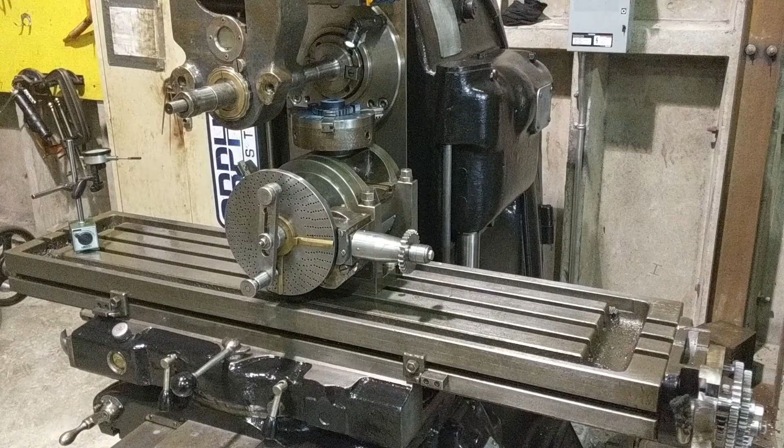So to finally finish off my gear rack assembly, I need to cut a dogtooth clutch on this gear. Much like the handle here. And it's 7-tooth. So most of you probably know this already, maybe some of you don't, but what do you index it to? Do you index it for 7?

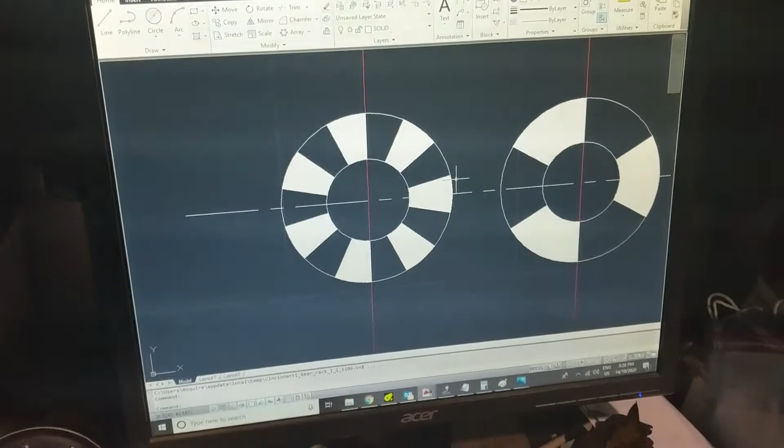Do you index it for 14? The answer is pretty simple. You just index it for 7. And I'll show you how. So I bring you over to AutoCAD because I want to show you, it's an easier way to represent this.

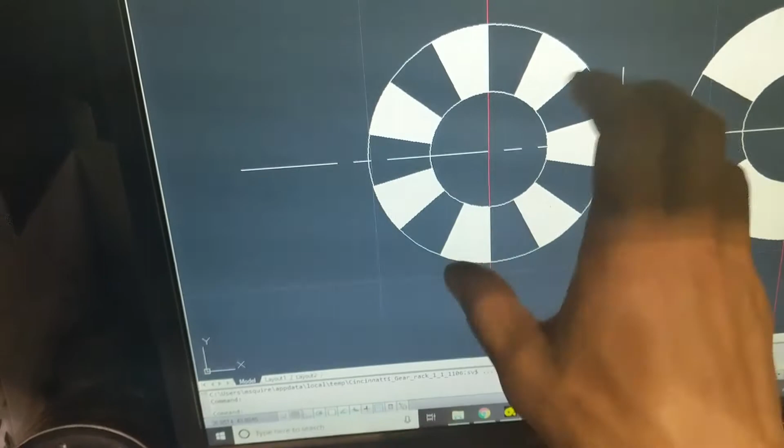So basically on these dogtooth clutches, the side of your teeth is a line that passes directly through your center. Odd tooth clutches are really easy to cut because you could just take an end mill or saw blade, as long as it passes through the smallest portion of the tooth there. You can go right on through, index it, right on through, index it, right on through. By the time you get however many teeth spaces done, you will have cut all your teeth.

Same thing with the 3 dogtooth clutch. It's very easy to do. I think you can get away with a 3/8. Yeah, you can get away with a 3/8 saw blade for that one.

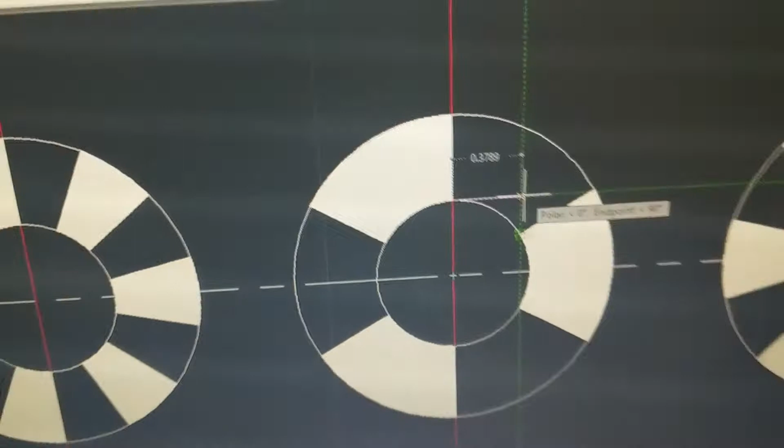Even tooth clutches are a pain because, well, the line still passes through the center of it, but a cutter cannot pass through the center of it. You wind up hitting into the other side of the tooth. So in order to do that, you'd have to do one face at a time, which is obviously going to take you twice as long. You could still do it with a slitting saw.

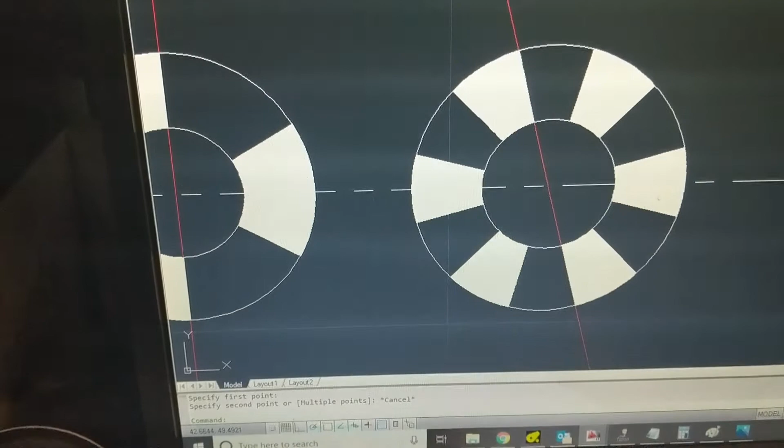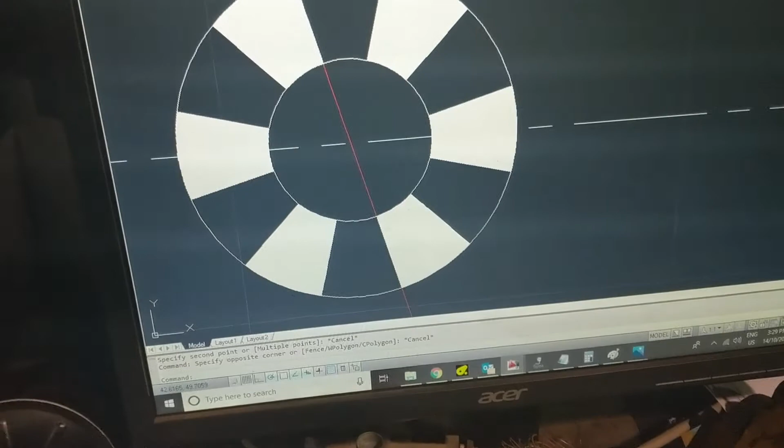So I'm using a 3-inch slitting saw, and if you find out the chordal distance at 150 thou deep, which is what I'm doing, you'll come up with, from the center, 650 thou. And there's a 7/8 hole in the piece that I'm making. So, if you go along with your slitting saw, by the time it exits the cut here,

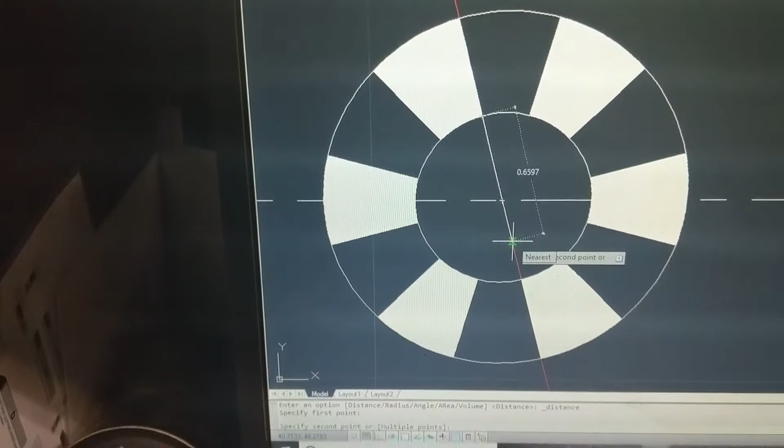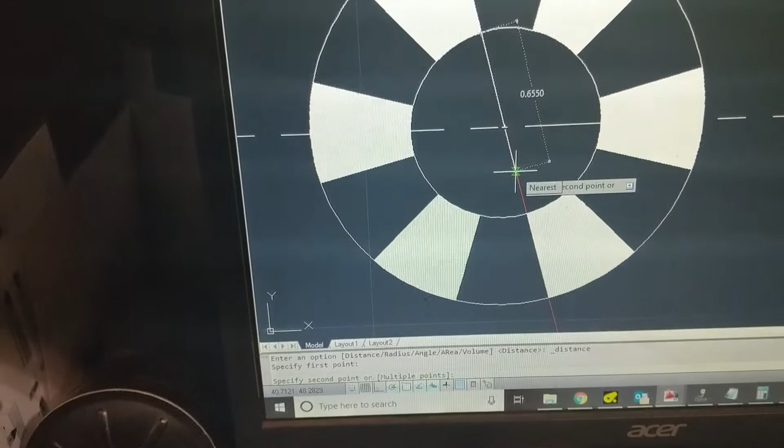your saw blade will be right there. That's how far it'll be away from touching the other side of the tooth. So you'd be good at 150 thou deep with a 3-inch cutter for this specific clutch. This would work out really good. It's a lot easier to figure this out in AutoCAD. You can figure it out just on paper, but it's a hassle. And anyway, I'll show you more about this when we get into cutting it.

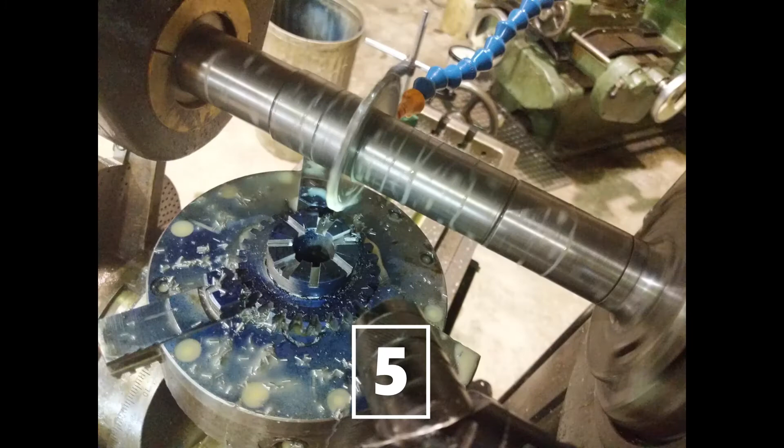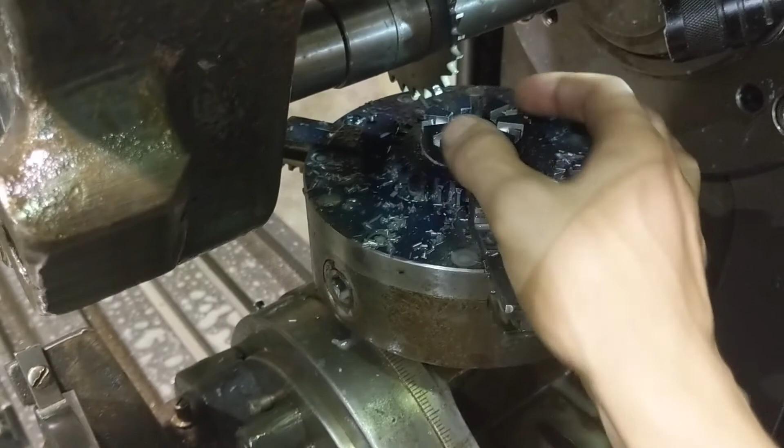So like I said before, I know the diameter. It's 1.8. I don't even need to concern myself with the thickness of the saw blade so long as it passes through the smallest portion of the teeth. So all you need to do is touch off, move it over 900 thou plus another 2 or 3 thou, and just start cutting. By the time you get 7, in this case it's 7 teeth, so by the time you get 7 spaces done, you have all these teeth.

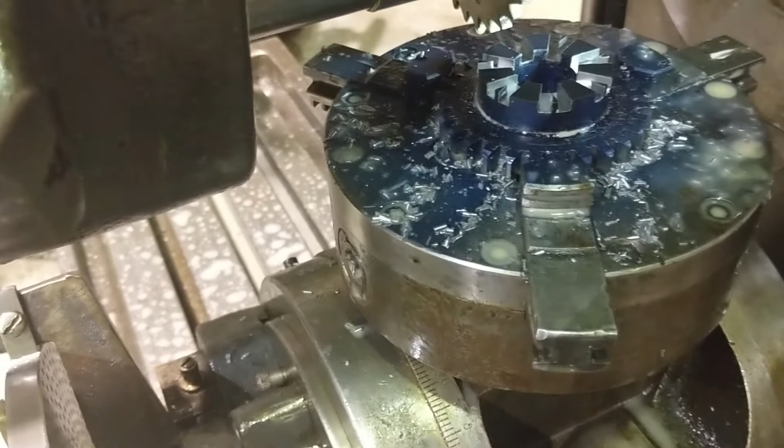Now I don't have a big enough cutter, so I got these little tits left over. So in order to get rid of them, you can just kind of do them one at a time, even it up on your cutter. You might have to actually put your cutter, center line cutter, to the center line of your workpiece and then do them one at a time. Or you can just grind them out. I mean, who cares, right? And then that's it. Then it'll be done.

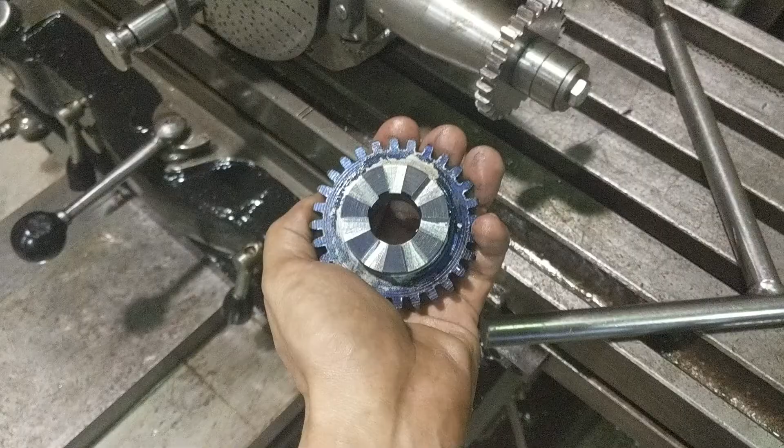And there you go. That's the finished product. I kind of like the finish that the saw puts on it, but there's no reason you couldn't use an end mill. It works just the same. It's the same principle. Anyway, I hope that clears up any confusion anybody has about them. There you go.